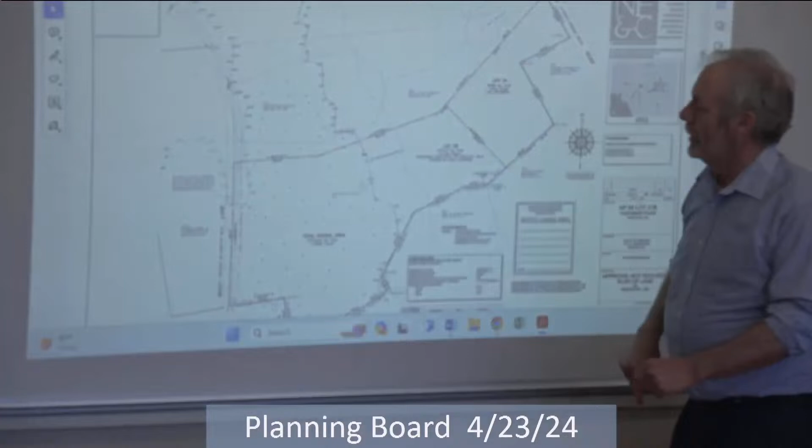It's totally up to you. I don't expect anyone to take my word for it, but look at page 149-21, I believe, of which this is - there's several lots going down along Macy's Lane that have houses on them already. This is the access from Cornell Road coming down through. That plan created a 40-foot easement right of way as part of Macy's Lane. Macy's Lane was approved at that time to be adequate with grade construction to provide such access for those lots. I don't think there's anything on these lots, and there's none on those lots up here.

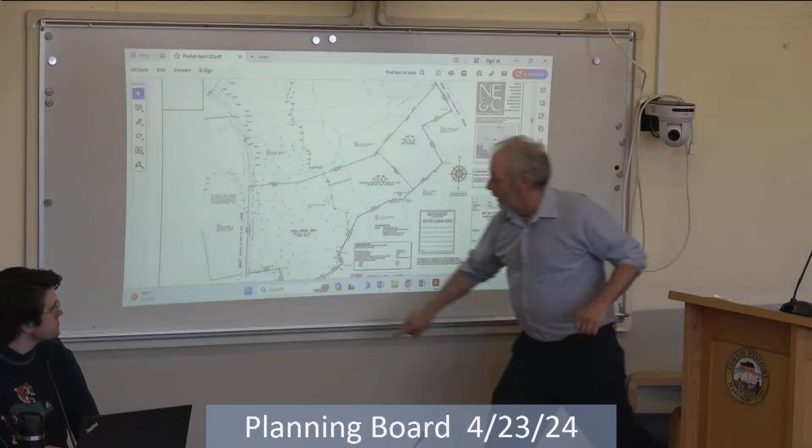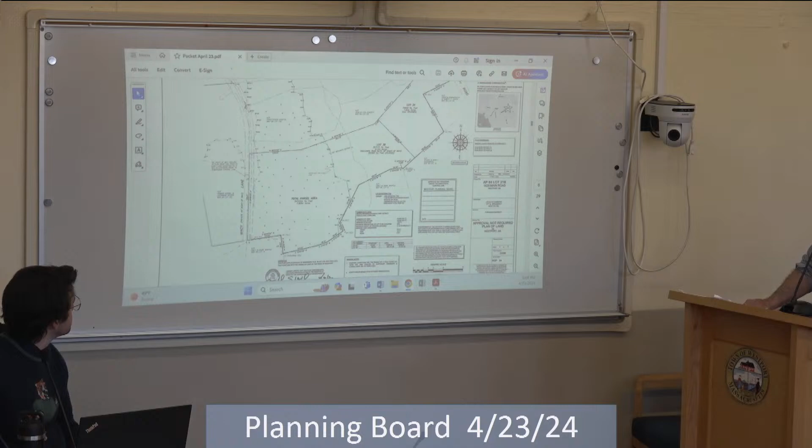But you can drive down Macy Lane all the way beyond? Oh, yeah, this is former owner Prelude - Whipple, yeah. And they drive down that all the time to access the house? Oh yeah, all the time. Okay, do you come in off Cornell? How do you get in there? Yeah, this opens on Cornell Road, probably about a quarter mile down the road from Cornell, almost 100 feet north of Judge's Way. Oh, way up there, okay.

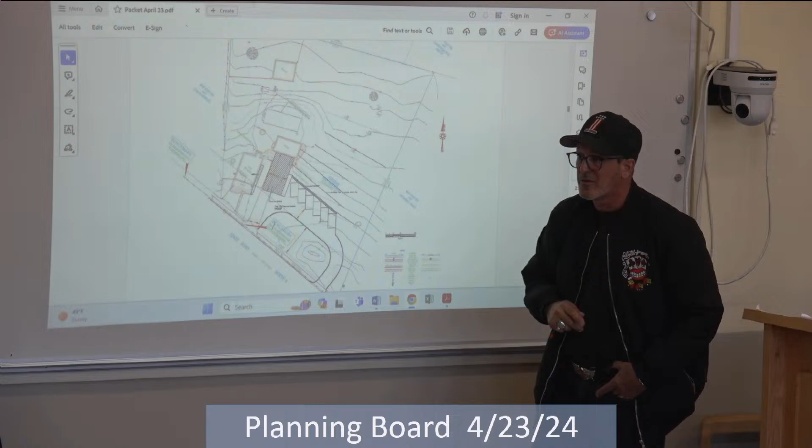If you get a lot of rain, does it pond back there? It doesn't pond, it just gets moist. There's an area beyond our property line, there's a rock wall at the back of the property line, and just beyond that is - I don't want to say wetlands - but it's an area that the neighborhood behind us used to push water to. That was something they had pointed out early on when we started looking around.

Because that area behind you looks like it's in a higher elevation than your lot, right? The one in the back, it does, it kind of goes this way, and that's why he's saying that beyond the stone wall on the neighbor's property is where sometimes you'll see some bubble up. I don't see that - yeah, it just gets moist.

Planners, what are your thoughts as far as stormwater? I would think that during the site plan approval process the consultant would handle the stormwater. I'm not comfortable commenting on stormwater.

Yeah, and that's standard for what we do - we route all of our applications to a consulting engineer to review and do the stormwater analysis. So myself as well, I don't want to provide guidance on how to design the stormwater since that's not my background. But as far as this plan goes, it would require site plan review and would have to go through the normal public hearing processes for that.

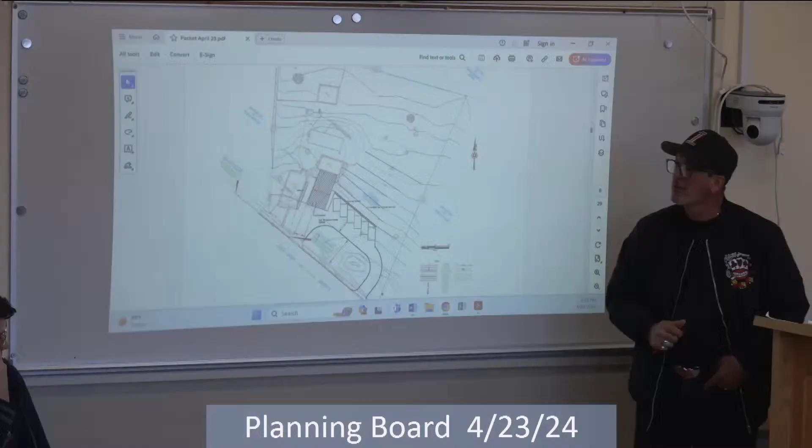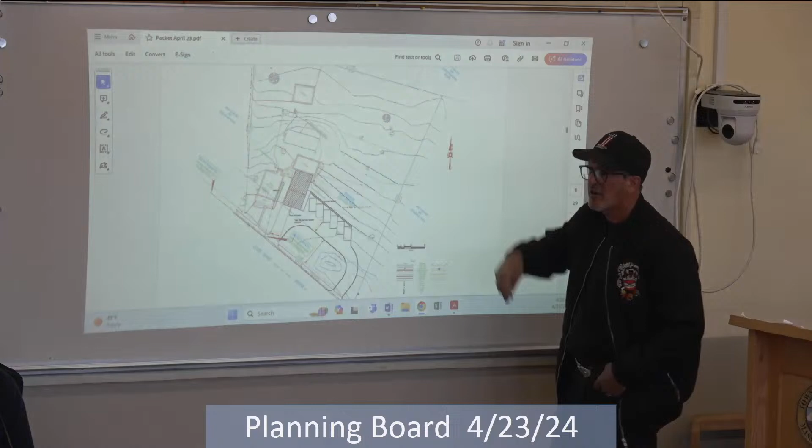Are there a lot of trees right there where you talked about the retention? No, there's just a little bit open. You can see this one tree is here, and this is where it was, but down here where the rock wall is, it's all trees, a bunch of trees in here. Because when I pulled it up on the map, it seemed like there were a lot of trees.

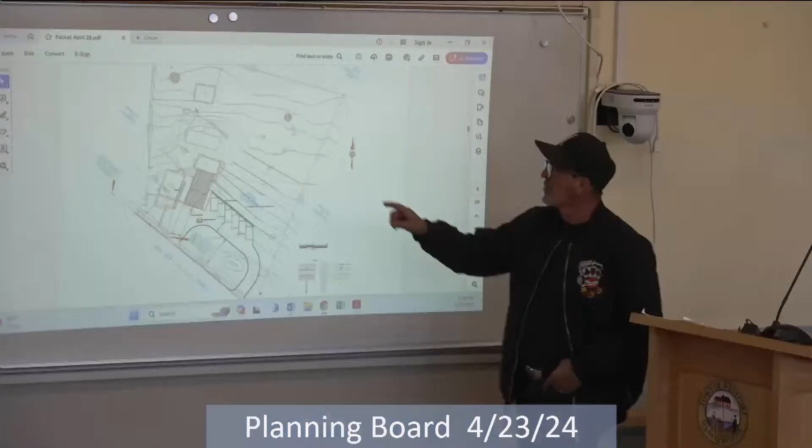That's over your property line. Correct, they're all kind of jutting towards us. I mean, this tree here is a nice sized tree here in the corner, and so is this one here. But the rock wall kind of almost goes right over here. I'm surprised it's not shown on this.

We also had a recent survey done by Farland Engineering, so we got all the topographical, and so we're confident from what we saw and our engineer saw that there won't be backflow into the street because of it. Yeah, it's a steady gradient all the way back from the street.

I mean, this site is a pretty easy site. You don't have difficult problems to solve, but you still have to solve it. Your engineer still has to solve it.

But it's not a complicated problem. The way it slopes away from the road, and the way it slopes down, and the way there don't appear to be wetlands, you've got something that's pretty straightforward for your engineer to work with, but he's still got to solve it. Of course.

Yeah, I can envision a small bioretention basin there. It's not a problem. The question that we didn't answer is how much it's going to cost for our engineer. And, planners, any idea?

Yep, so I actually just emailed you the fee schedule, but the site plan, it'll be a major site plan. It won't fall under a minor. So that's 700, and then for the consultant fee, we do require 2,500 upfront, but anything that's unused goes back to the applicant. Is it billed by the hour, basically, or is it by the job? It's by the hour. And that's all part of the major application, correct? Yeah.

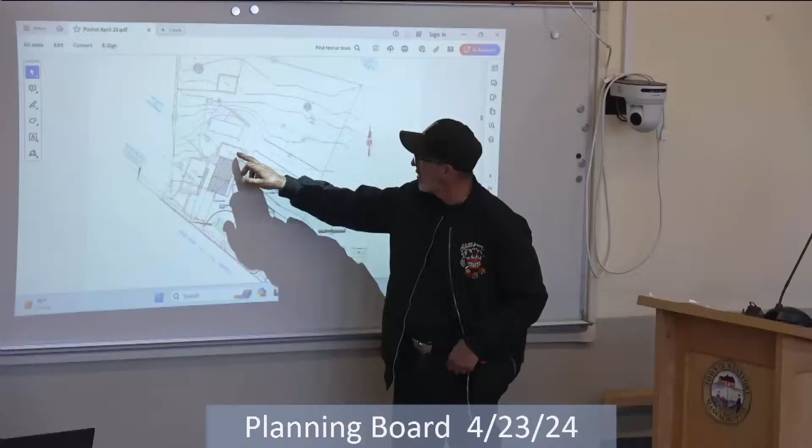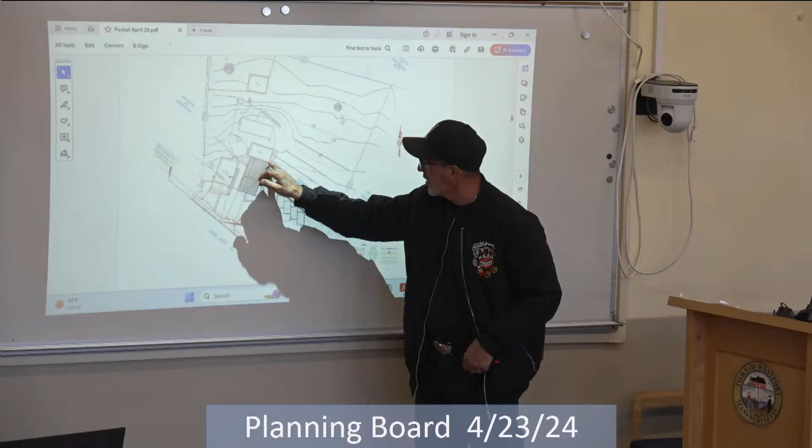This one here, the one close to where you're attaching the addition? Existing garage, a 2.5 car garage. And it's going to build out, most of this is driveway. This here is about 12 feet, but from here to here is about 20.

So the addition you envision, is that going to be a single-story, 25 by 50 steel building, slab on grade? We're going to be doing a frost wall.

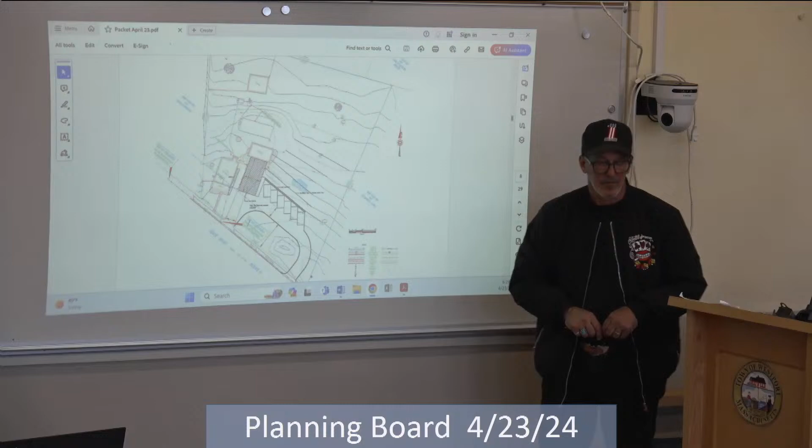And it's going to be a workshop, for restoration. I assume the distance separation between the residence and the new building is 12 feet. It's 12, and that satisfies - I think the engineer will check on it, it had a minimum of 10.

And then the last thing, that square building in the back, what use will that be? That's another dwelling. So you'll have two separate dwellings plus a business use. Yes, and that's why we have six spots.

Has there always been two dwellings on this lot? Yes. So does that predate zoning?

Is there any driveway access to that back residence? You just have to walk out.

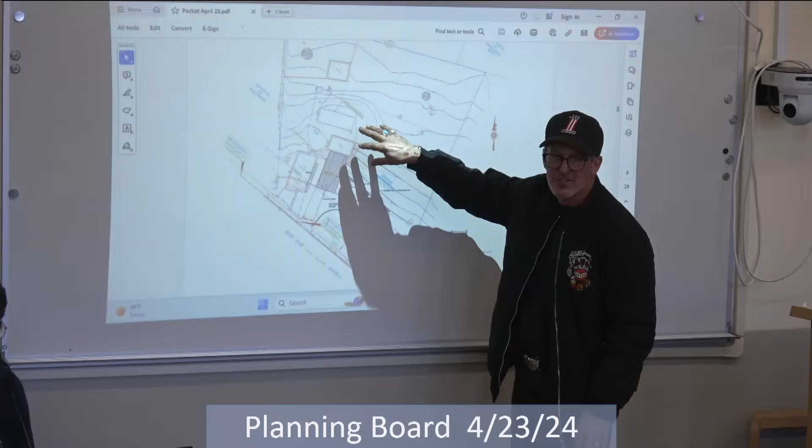I think managing the stormwater right close to the paved area is probably the thing to do, because that Hebert Terrace residential street comes in right at the bottom. I wouldn't put the water down on the property line, I'd solve the water problem up where you're generating it, up on the side hill. Should be cheaper too. Yes.

The property line to the right of the site? The back end, rear property line. Okay, yeah, makes sense.

You plan to restore motorcycles, correct? Yes. And do a lot of your customers drive motorcycles? Yes.

Is there a parking definition for motorcycle parking spaces? They don't seem to take up the same amount of space as parking spaces for cars. There's a catch-all requirement for parking for uses classified in the zoning bylaw - they would be required to have a standard parking space, 10 by 18, based on the area of the building being constructed, in addition to the uses already on site. There's no specific regulation for motorcycle parking in the zoning bylaw.

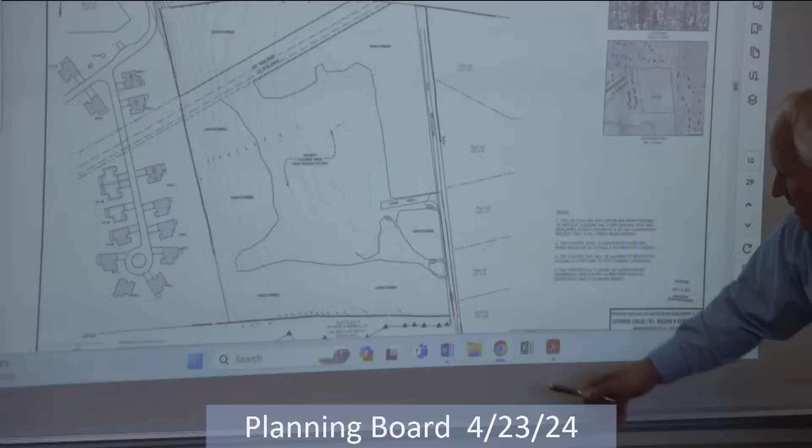During the original permitting process, we did get an EPA NPDES permit. There is wetlands located to the south of the property, south and southeast, which is shown here. And there's also a wetland over in here that exists.

We're proposing that during the development process, when the clearing was done, some gravel had been added to Mellows Way, a couple inches in this area, and this stone driveway was also added. We're proposing that we bring that back to the original grade so that we don't change the flow patterns on the property.

The site was not graded other than through some soil testing that was done when we did our test pits. When some stumps were removed, they were removed by an excavator. There's never been a bulldozer on the site. That's caused the contours to change with the exception of a few inches, as opposed to large cuts and fills.

We took SW Cole, Roger Poisson prepared a report for the board. We agree that there are ponding areas on the site at some of the test pits. Those settle over time, so there's a little bit of depression storage that occurs there. Roger referenced some ponding over the gas easement, which is well beyond the ownership of my client, and it's not anything that's attributed to the work that was done associated with the clearing.

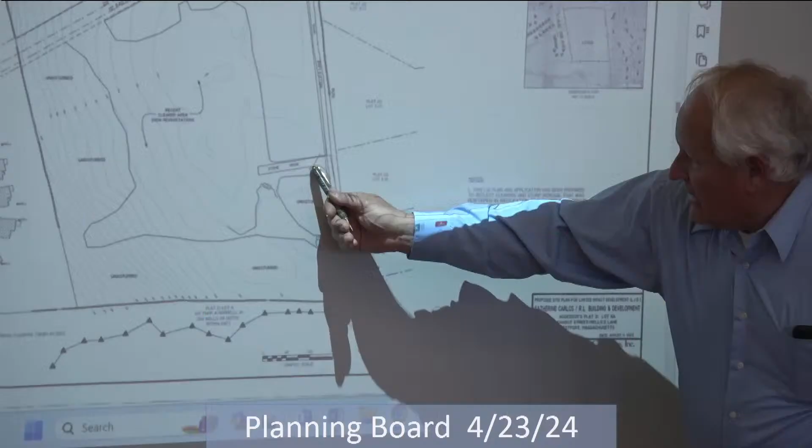There is some ponding that occurs in the southeast corner. Down in this area, we have some ponding that occurs alongside this driveway, and in this area, ponding in here. This used to be the old cart path in and out of the property, and when it was used for some of the clearing and the soil testing, that sort of thing, that caused it to deepen a little bit and hold more water than it initially did.

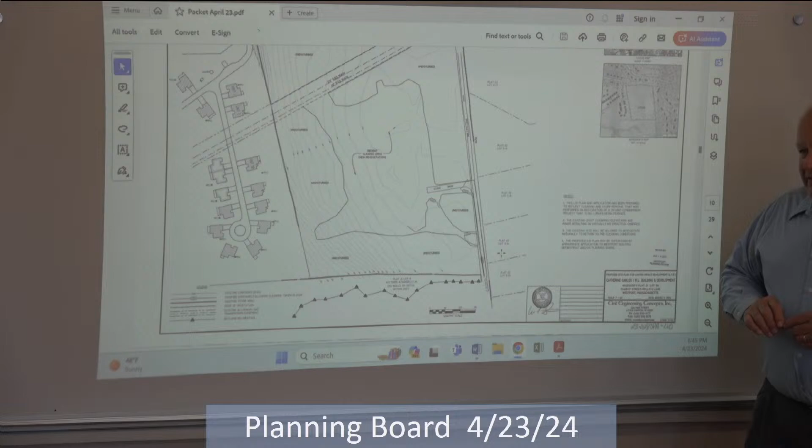There is some ponding that's occurring here. The roadway is higher than the land on both sides of it, so we are getting some depression storage. The topography out here is very flat, so the water doesn't move very quickly. There's a lot of depression storage on the property.

When Lighthouse Lane was established in '03, I believe it was, there's a wetland pocket down in here, and I think some of that has attributed to some of the water that is being seen on the adjacent properties.

There is a pile of trash on the property. Looks like it's clay tiles or porcelain tiles, which will be removed. We were hoping to have that done before the meeting tonight, so I could report that, but we will get that out of there.

One of the neighbors had reported to Roger that there was what he referred to as a Jeep lane in his report, Mellows Way, and that was actually higher in elevation than the road as it stands now. Gravel was added to that, but there was no cutting of that land. I think that incorrect information led Roger to believe that by the elevation being lowered, we were allowing more water to get to the east onto the neighboring properties. That's not the case. We raised it a couple of inches. Not significant, but we admit that it was a couple of inches there.

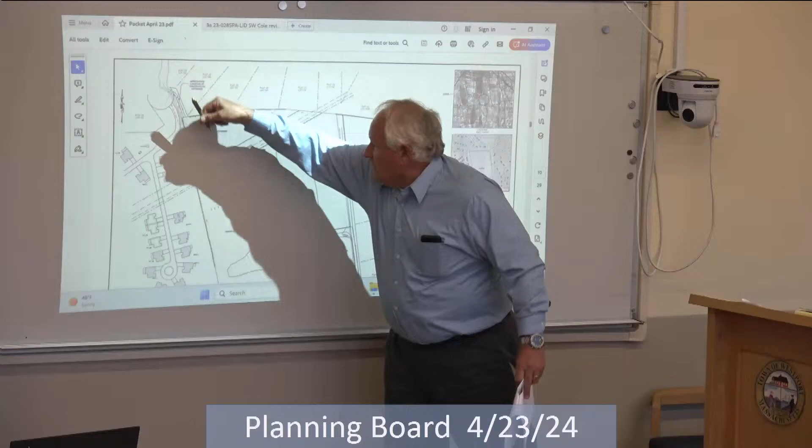This is down off of Shabbat Street, and the Oak Ridge development is down here. This was going to be an access to the property, and there was some stone there for a construction entrance, which has been removed and it's revegetating. That would be up in this area over here, looking this way.

So this is on the Carlos property. You can see the vegetated buffer that hasn't been disturbed. This is some of the clearing that took place to the bottom of the photograph. Again, looking out into some of the cleared area, you can see where the vegetation is coming back in force, and some of the vegetated buffer that surrounds that.

Get some more, lots of rocks out there, weren't vegetated before, still aren't vegetated. Again, here, this was an old roadway, part of that old farm road that came through, and it's coming back a little bit slow with the vegetation, but you've got a pretty thick stand of vegetation around that. Same thing here, and here, and there as well.

And this is the gravel or the stone drive that we talk about. Mellows Way is running perpendicular to that. That's the tile that we will be getting picked up. Again, more rocks, more vegetation.

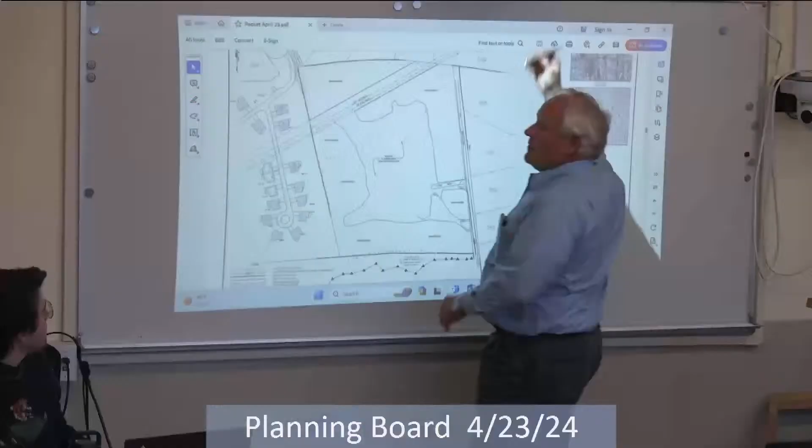So Michael or Amy, you want to go over the Cole report? Sure. Want me to read it? Please, well, I don't think you need to read the whole thing, but if you could read the basics. Sure. If we do- Okay.

Okay, so I'm just going to read just 3 paragraphs of his comments. The first area behind 23 Duval Ave at the northeast corner where drainage would be impacting neighboring properties is noted to be as predicted for drainage area 2. Pre-development conditions have the flows from the smaller of the 3 drainage areas flowing toward the southeast corner of 23 Duval Ave, and no change is noted currently. The last work that was done impacting that site would have been when the gas pipeline was installed.

The second impact area is behind numbers 42, 46, 50, and 54 Lighthouse Lane. Based on pre-development stormwater map, these flows are predicted to flow in that direction. The removal of the vegetation that once slowed and held back much of the flows, and the removal of the jeepway that once existed, has increased flows onto said impacted areas. The applicant's recommendation to allow the cleared areas to revegetate themselves to create the required vegetation area as once existed to hold back and slow flows is plausible but extremely time consuming. The vegetation that was there probably took decades to establish. Unfortunately, the impacts are being felt today by the affected neighbors.

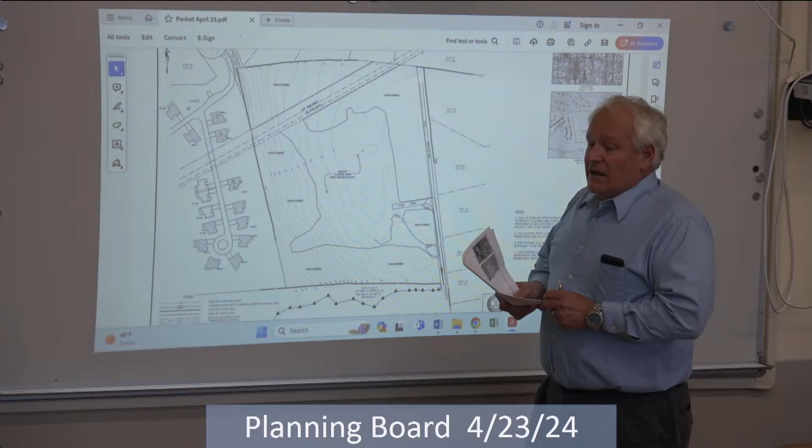That's the gas easement pond that was shown in that photograph. That wasn't attributable to the clearing work done when they backfilled the gas easement, they left the low spot there.

The other properties mentioned, the Lighthouse Lane, those are these properties down here. That's the one where we talked about the water flowing this way in the photograph.

The road was not cut out to divert the water this way. It was actually filled a couple of inches, and it's low on both sides of the road, so they tend to collect water there.

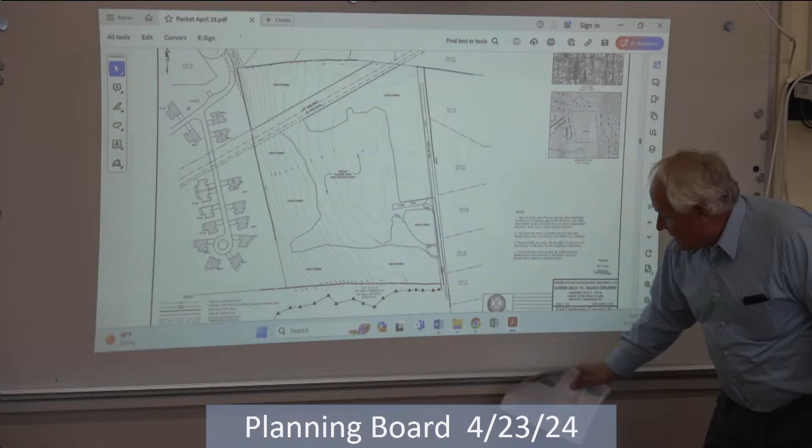There's a wetland for the Lighthouse Lane subdivision down in here, so it's certainly a damp area to begin with.

The topography up in here is extremely flat, so there's not a lot of slope to push water around. There's a lot of small depressions, and that's evidenced by the photographs.

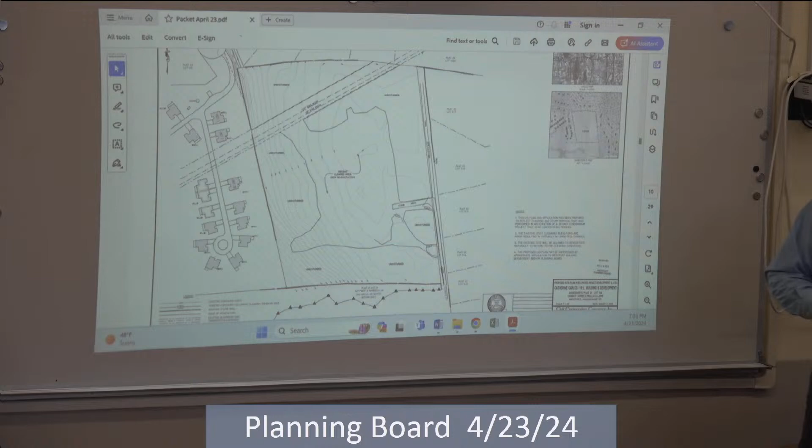The berm that Roger talks about, a porous gravel berm, his sketch showed that being installed on the west side of the roadway.

With a swale coming down through here. If I can bring to your attention, I do have a wetlands line down here. This is all vegetated.

I hate to have to take more vegetation out of the mix to do that. And again, a porous gravel berm is really not going to work well, the water's going to move through it anyway.

I don't know if that would be as functional as he would like it to be.

So, with Mellows Way in that area, you raised the level of that anyway? We brought that up a couple inches with gravel over top of it.

Our position was, let's try and restore what the original drainage pattern was there by removing the gravel. If the gravel itself could act as a berm to provide that same function Roger was talking about with the porous gravel.

And it is higher than the neighboring properties, so it would in fact act like a berm.

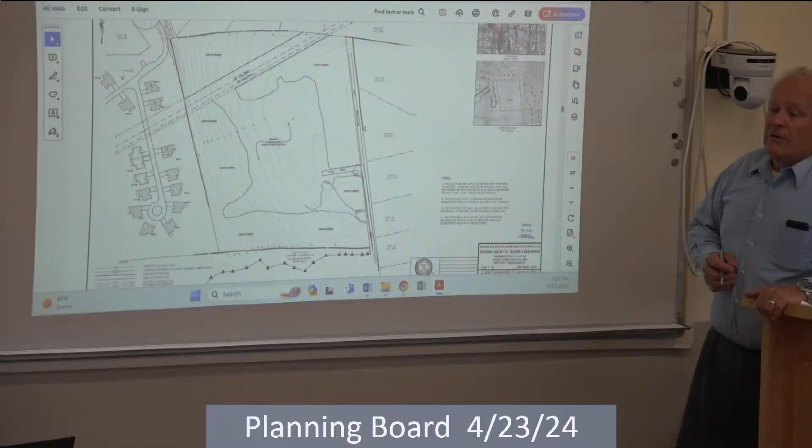So I'm going to go to the board first. Any questions, comments? I'll get to you.

Planners? Okay, so this has been going on for a while, and I think there's two issues at hand here. I think something needs to be done for mitigation for the water that's going onto the abutting properties.

But I also think that, and what you're proposing sounds good, I'm in favor of going more towards what Roger's recommended. I think a lot of it also is just because we've had an insane amount of precipitation.

But I think going the more conservative route with the berm and the swale would be better for the site, only because we've seen from the pictures the massive amounts of water pooling on the property and then going off the property as well.

And the revegetation, it is growing back, but a lot of large trees with root systems were taken out, so that won't properly revegetate back to its pre-construction status for years and years.

Just one follow-up question. As we said when Mr. Burke was here, we rely very heavily on our consulting engineers to provide us these recommendations, and typically that's the way we go, with the recommendations of the consulting engineer.

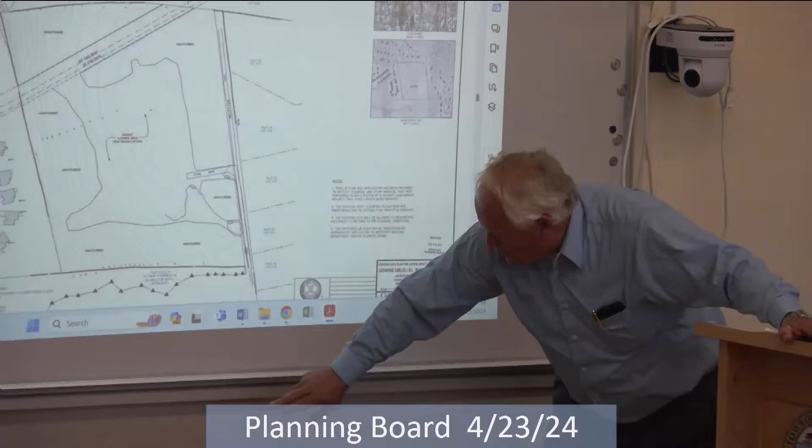That wetland is down in here, and it used to relieve itself across Mellows Way down here, and that's been raised a little bit too, which could cause some of that water to build up here and then have to reach an elevation to allow it to relieve itself.

So the lots on Lighthouse probably during their construction were mounded a little bit, and so what is sort of a flat sitting at the top of this hill is just a place where the water's standing. I think getting the road back to its natural shape and seeing what that does - that's a pretty easy piece of work.

One suggestion I have is maybe we should just ask Amy or Michael to propose that to Roger and see what his reaction is, and maybe we don't need a site meeting. Could be. I think the site meeting would be helpful, because I can bring my level out.

We can check grades and things like that, to ascertain which way water is moving, where it's moving, that kind of thing. And I'll try and scrape back some of the gravel so we can see where the original grade was, and hopefully we can agree on what makes the most sense there. In terrain like this, it's not easy to determine which way is going down.

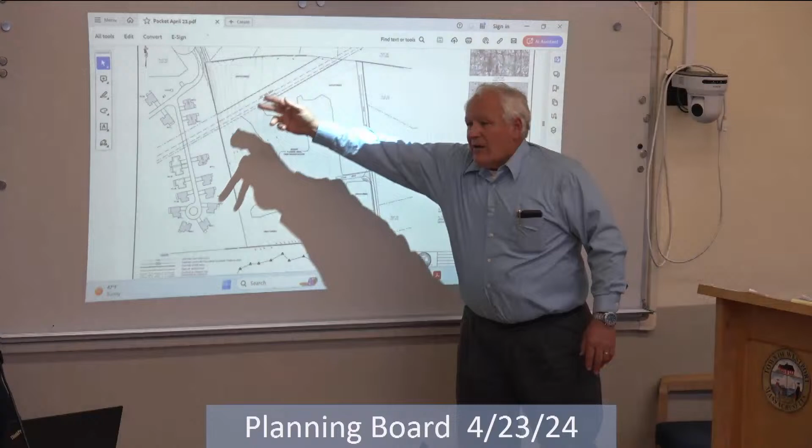And that will take some time, but it's also kind of the way forests develop. And every one of those ecosystems attracts different animals and has different benefits. And it happens by itself without a lot of heavy equipment coming in, digging big holes to plant big trees. And so people who are there see it, and it's gentle on the environment. And we do have the latter stage around the property, and the area that's been cleared is starting to revegetate in some of the first stages.

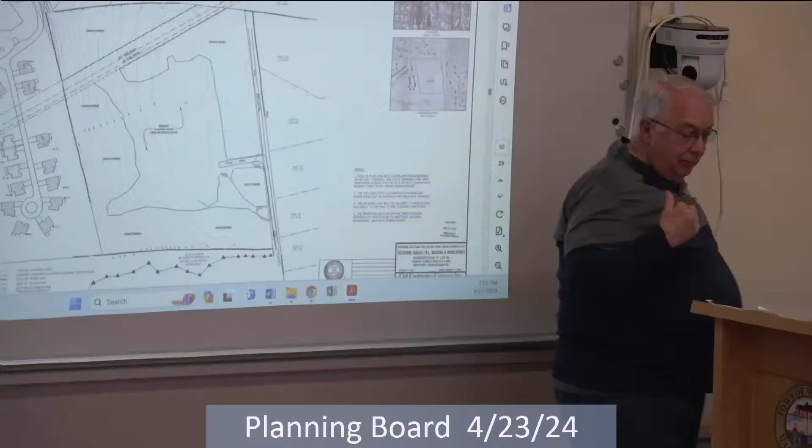Okay, so you would like to speak? Yes. First of all, could you identify who you are? Yes, I will. My name is Tom Lockman.

I live at 54 Lighthouse Lane. And I own the property since 2013 and haven't had one problem until they changed, started developing the back. And this winter, I had a flow of water from the middle of January, probably about the 10th of January somewhere.

March, and I sent pictures all the time to the town of the water coming through Melrose Lane. And I've walked the property in the back, and I met the town engineer, and...

The water isn't flowing onto their property. The water is starting up here, it's flowing down. And the water used to flow out. And if you stay on Melrose Lane now, there's a ridge of dirt and boulders in here that is higher than Melrose Lane. And that's trapping the water as it flows down.

And the water is flowing every direction. Up in here, there's a puddle in here, up in here. There's a puddle off of the gravel here, I saw pictures, and then it floods through here, and it goes over Melrose Way. And the reason why it goes over Melrose Way is that the back over here, where it used to flow out, this part now is higher.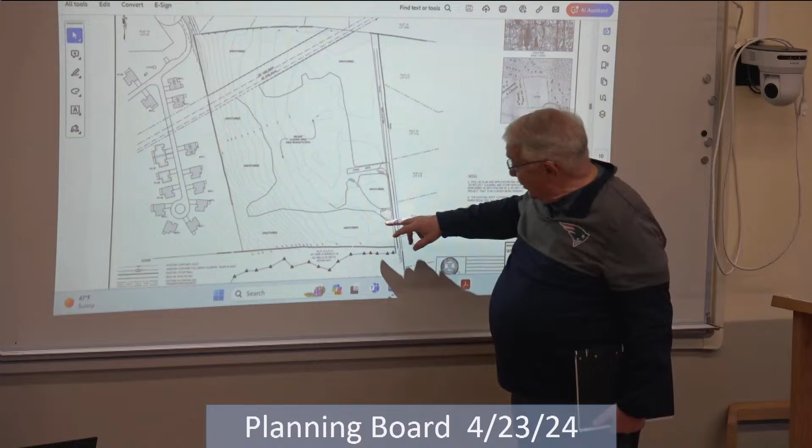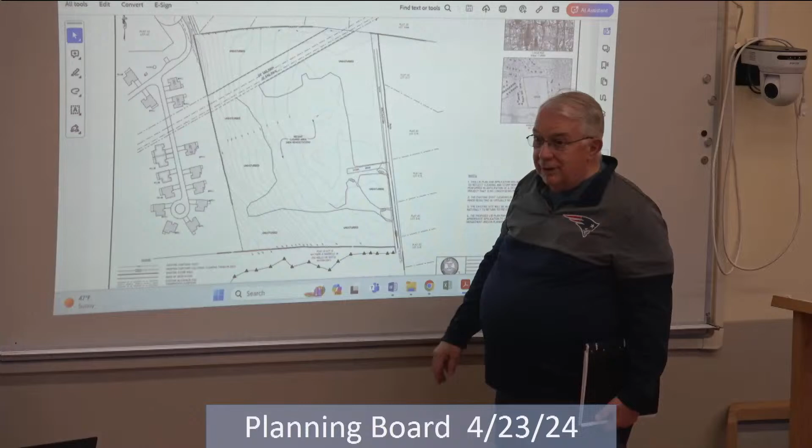And as you walk down, you were going downhill. And it's not like I can recreate it, but the slope is there. It's down there. And if you come now, if you go in here, this is higher than here. And that's what's creating the problem. And when I was out there, the engineer would walk through this whole area with boots, and walk down here and he could see it. So, I don't know what else to tell you. Okay, thank you.

Yes. Hi, my name is Patty Lucarelli. I live... Could you talk more into the thing? Oh, sorry. My name is Patty Lucarelli. I live at 42 Lighthouse Lane, and I'd like to address a couple of the comments that were made.

First, there are ATVs and motorcycles that travel along the back of the property. They're not going through now because it's too cold, but in the warm weather, they're constantly back there. I hear them because my property abuts that. So I hear them all the time, and that's just happened in the past year or 2 years.

So it's happened recently, there's that nuisance back there. Second, the water flow traveling through Mr. Longman's property is actually flooding parts of the sidewalk and the street. I know because I walk my dog in that direction every day, but that's where the kids wait for the buses, so they're not able to stand and wait on those flooded sidewalks. Instead, they're having to stand away from the bus stop or on the part of the road that hasn't flooded.

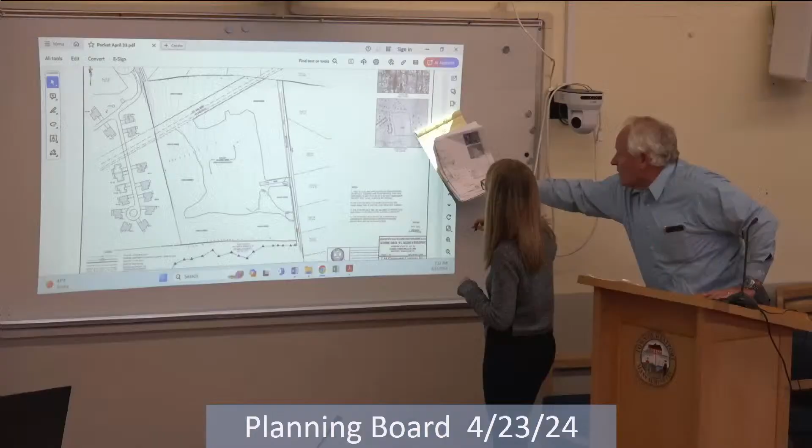Can you point to where they are standing or trying to stand? It's not going to be on this plan, I can't, I don't know. It's in front of your house, up here. So here's Lighthouse Lane right here, yeah, so it's all in here with the flooding. Gotcha, thank you. Right through there with the flooding.

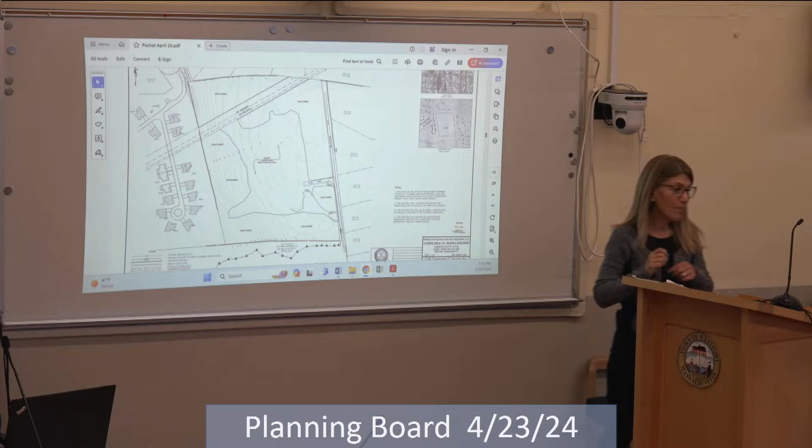The last comment I'd like to make is that the town engineer who authored the report provided to you has no financial interest in anything he's recommended, as opposed to, with all due respect to this gentleman here, he's representing the owner and the developer. They have a financial interest in not wanting to spend money, or in how much money to resolve this issue. So I would implore the board to give the weight due to your engineer. I don't know if you have any other questions for me, but I am concerned with the amount of water. I've lived on Lighthouse Lane for, I believe, 11 years now, and we've never had this issue before. Thank you.

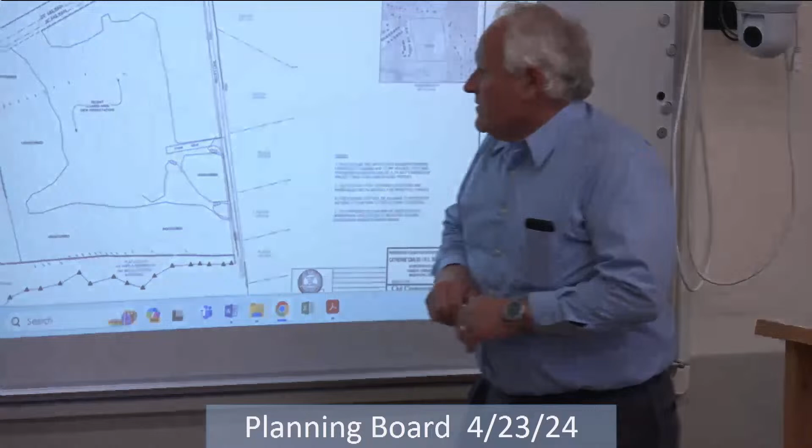Could I just respond? Yes. So the question about this area being regraded, there are rocks the size of cars in there. We dug test holes, we pulled some stumps, but we never got in there with a dozer, we never changed the grading other than cleaning up the work that was done. So there was never an intent to raise this grade.

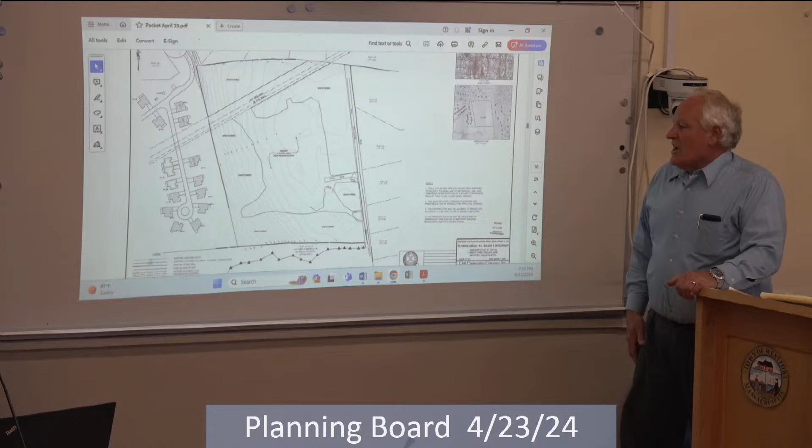Thank you. Anybody else? Yes, sir. Evening, my name is Jonathan Danforth, I live at 50 Lighthouse Lane. I've only lived on Lighthouse Lane for a couple of years, so I don't have the historical perspective that my neighbors have offered. But talking with them, as well as other neighbors who are not here tonight, it's clear that there's a correlation in time between the development and a change in the patterns of what the water is doing. I think that's important because it doesn't show up in pictures.

I also want to say that if we're going to look again, together or however, at the site, it might be useful to go out while it's pouring, and I'll say why. Because, as Tom was saying, the water does flow across from west to east at the point of, I think you called it a cartway, the southward driveway kind of thing. Is that what you called it, a cartway? There's a cart path. Yeah, okay, thank you, I just wanted to make sure I got the word right.

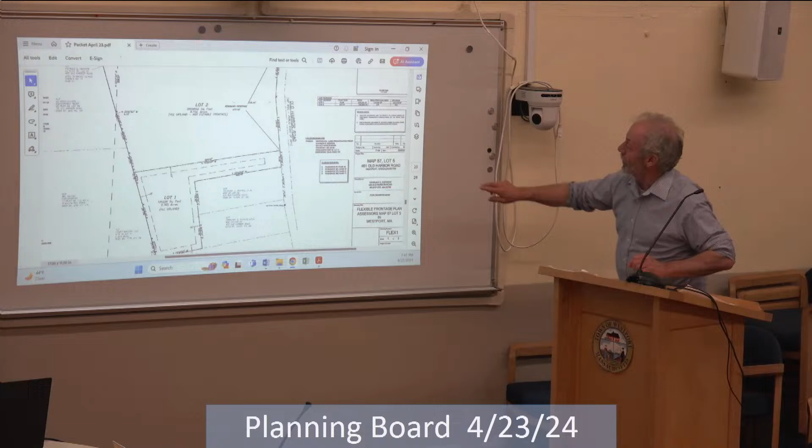But what we're creating basically is one flexible frontage lot and leaving the remaining land as is, with about 350 feet of frontage left and about 8 acres. We're creating a lot with a little bit less than 3 acres with the 76 feet of frontage, which meets the frontage requirement listed here in the table. I know there were some comments, I don't know if you want me to address the comments or anything here. There are a couple of things I've added to the plan since then, but we were waiting for the final plan to see if there were any comments from the board itself.

Okay, is this the same, are these the same parcels on which he is looking for a site plan review? No, this parcel is separate, and the other parcel is, you can scroll up way to the north of this. It's a completely different parcel north of here. So this is this parcel, this. Yeah, this is kind of confusing. Oh, here is the parcel with the house, the library, and the barns, and everything. Is this parcel here, this is this parcel here. And the one in the middle is the one he wants to keep? I think there's a plan, and I don't want to say this, and I don't want to commit to anything, obviously. There's a plan to combine some of this with the Westport Land Trust, which is just on the other side of the... Yeah. Okay. Okay.

You want to read the comments from the various boards? Let me just get into the...

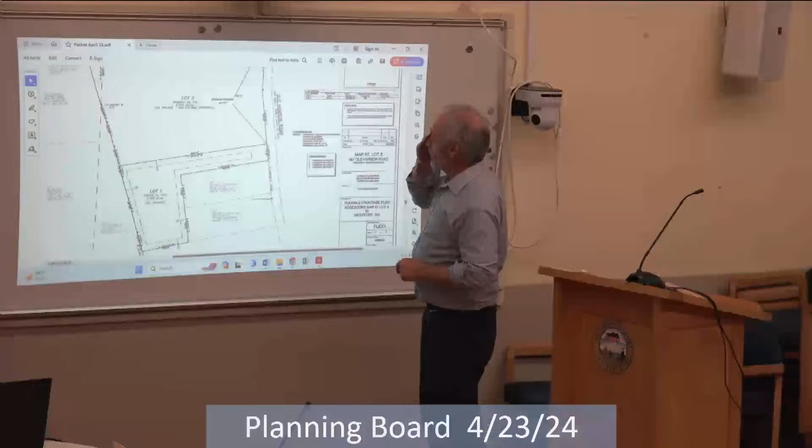The yield plan shows 5 lots. So it would technically still be decreased by 1 lot. If you did a yield plan, Bob, I know what you're saying, and I don't disagree with you. If you did a yield plan of a stub road here, created frontage, you would come up with 5 lots. If you did it this way with 3 Form As, you'd get 4 lots, so you'd still have less density.

I know what you're saying, that if you showed a regular ANR for this whole parcel, you still have 4 lots, correct? No, if you did the whole parcel, all you can get is 3 lots. No, 3 plus the one down below. No, if you didn't do the flexible frontage. If you took the frontage and divided it, all you can get is 3 lots.

Correct, but total if you took it, 550, right? But if you took a subdivision road in, then you would get more, and that's what the yield plan typically shows, that this is what we could max out at. But because of this, we're reducing what would be. I'm pulling up the yield plan right now.

Okay, just give me a second. I know exactly what you're saying. It's an unusual situation because usually there's a lack of frontage on these type of lots, that's why you do the flexible frontage, there's a lack of frontage on an accepted way. This lot happens to have a lot of frontage. I rarely get calls on ANRs, but I got one on this. Did you? Yes, I did. Wow.

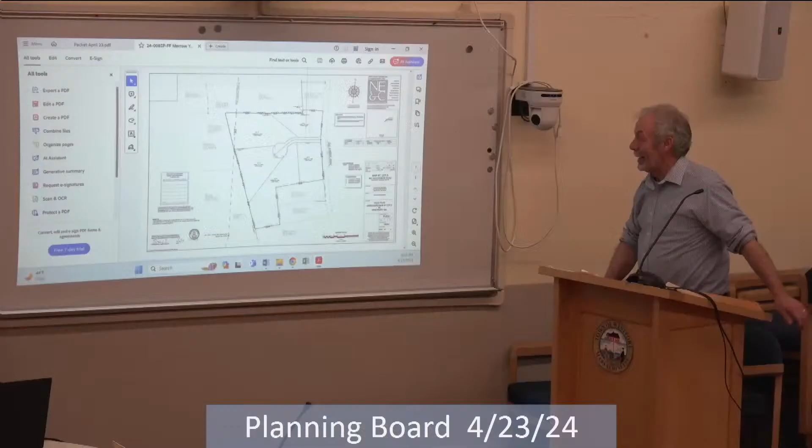There is a, okay, so this is very basic, and these lots are very big. You probably could actually get another lot out of this. These lots are all significant size. These two are about 60,000, but these are bigger in size. So if you did just a basic road, you'd get 5 lots.

So therefore, you increase the infrastructure and all the things that you're trying to avoid with a flexible frontage. I hadn't seen that. I know, I understand your point exactly. It doesn't seem like it's the intent of the bylaws to allow what could happen.

Right. Well, is there anything that prohibits us from limiting Lot 2 to 4 lots, to 2 lots in the future? 2 lots or 3 lots? 2. 2 in the future, so a grand total of 3 when you combine it with Lot 1.

I don't know how you would do that. I think there's no way to do it, John, but I think there's a mechanism if you want to do that. You could say that the big lot is part of this, and so that can only be 1 lot, and the other one could be 1 lot, and there'd be only 2 lots total. But that's not what they're looking for, so.

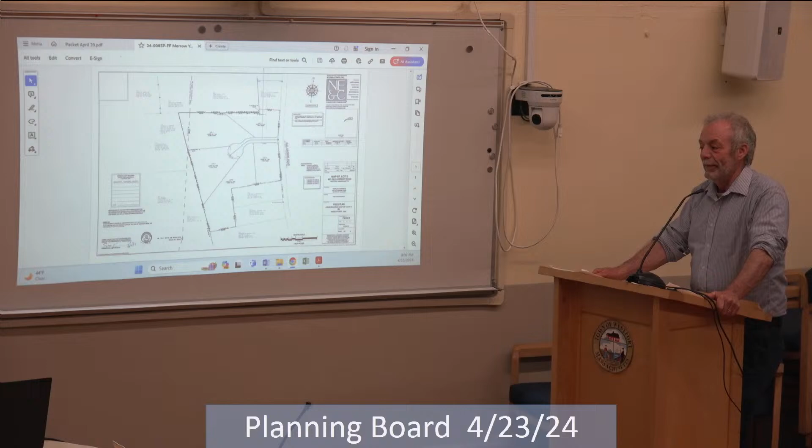You do have to put the road in, but people love being on the private roads on the cul-de-sac. I'm not a real estate expert, but I would say all those 5 lots would be fairly pricey. If you really want to stretch it, you'd probably get 6 lots out of this.

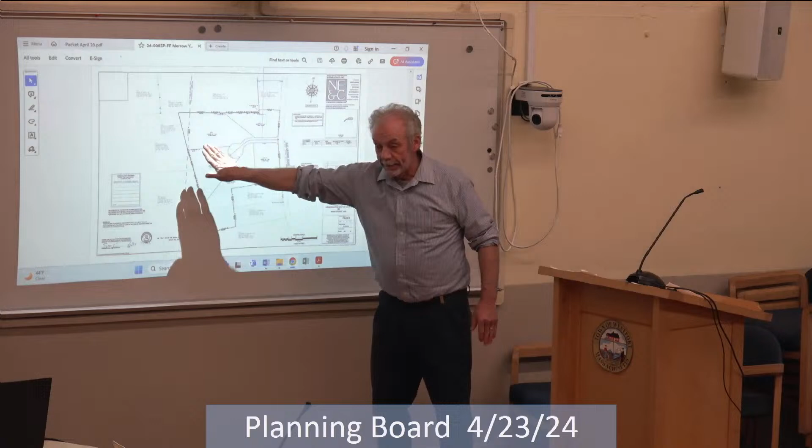Is this lot, I have no sense of the topography or the vegetation. Is it all woodland, or is it all cleared? It's very nice dry woodland, all wooded, fairly good land for Westport Harbor as Westport Harbor goes. It comes off the road fairly quickly, steep, then flattens out, and the back drops way off. But that's in Rhode Island, in Little Compton.

That's a different issue. Do they have water there? Fresh water? Because parts of the harbor don't. Right across the river on Old Harbor Road, there's an old spring where all the harbor people used to go and get their big, huge glass bottles filled up. I know they have water here, and there's a household here that has water. I think they can get water. I know there are problems.

This is, as water goes, on the other side of the ridge, the good side of the ridge, so to speak. It's not sloping down towards River Road. When we were looking for water with Weston and Sampson for the harbor, this area, especially just across the street, was a place. I think the old well house is still there, part of it. There is a well house there, still.

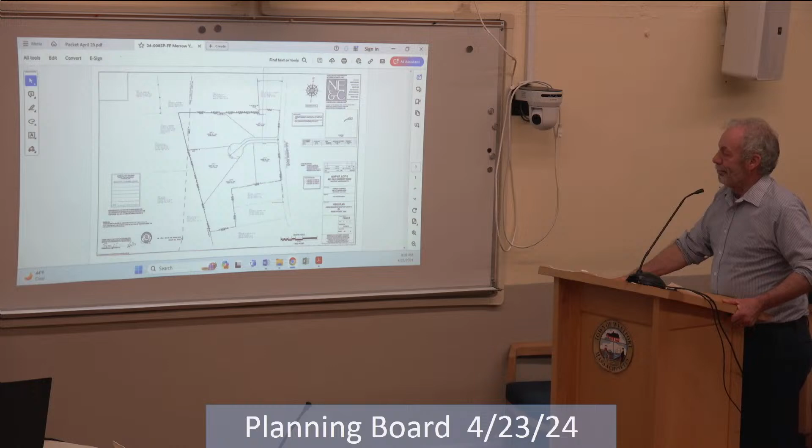In the woods there is an old well, yeah, an old well house there, that used to be part of... it's weird because this road didn't exist. So it was part of this, but all the people used to go use it. I think whatever cart path existed around here turned into Old Harbor Road. It might have been a spur off of Records Way to get there. Well, there's another wall that goes down from the well, heading toward River Road. I don't know where it goes to. My guess is towards Brian's land or something. I'm not sure where it goes.

No, it comes out, it goes almost to the end of Maple Lane. Oh, towards Maple Lane. And there are other walls up in there too, they're all over. That's where this is one of these places across the street where walls go to die.

So, what is the sense? I would welcome any motion.

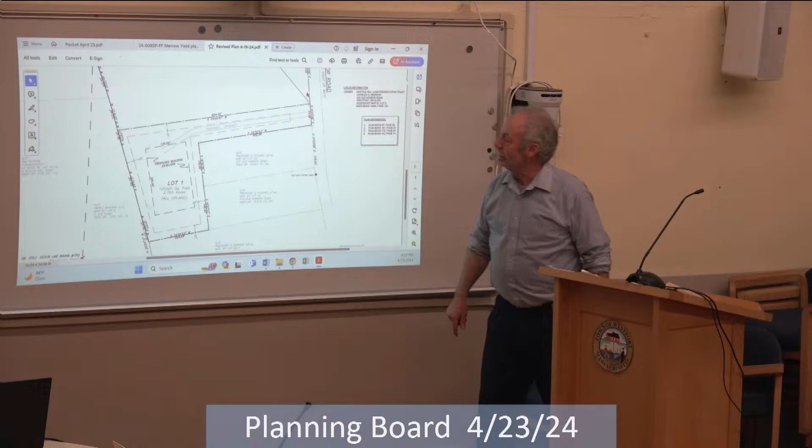Okay, this is showing the proposed building envelope, assuming the driveway comes in. I don't know where else you'd put it.

So do we have one action or 2 actions? Do we have to deal with this first, and then deal with the ANRs, which create the lots? So this is a special permit application? Yeah.

And in the order of this, do we make the motion on the special permit and then have Amy read the sample findings and sample conditions?

All right, I will move that we grant the special permit application of Charles Merrill for property located between 453 and 471 Old Harbor Road, assessors map 87, lot 5, owned by Levine Edward Harris, trustee of the Nudist Hill Land Preservation Trust, pursuant to Westport zoning law, section 8.6, special permit for flexible frontage, requesting approval to reduce otherwise applicable frontage requirements on a public way in exchange for a corresponding reduction in development density, creating one new lot.

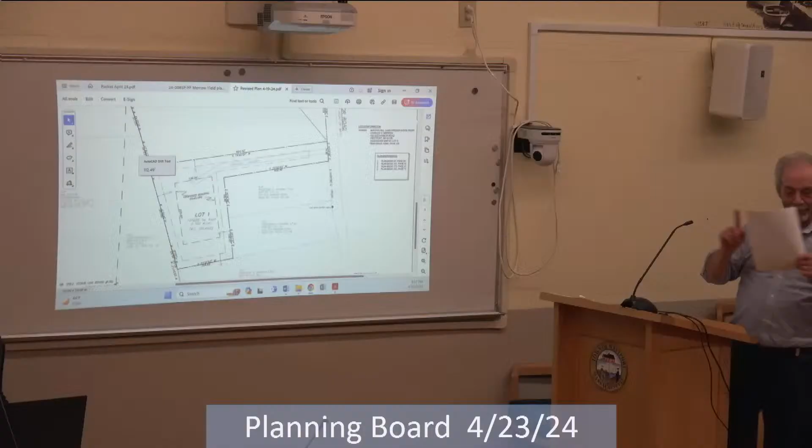Thank you. Thank you for helping me with my multiple meetings at the same time. Okay. Roller skates will be in the mail, Sean. Well, I'll need ice skates in the winter. All right, have a good night. Good night. Hope you finish. We're almost done.